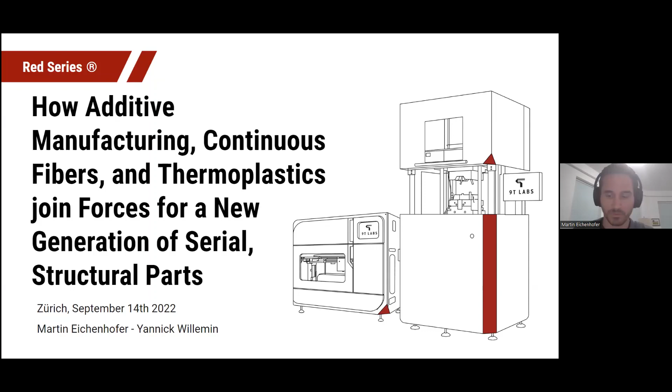Sven already mentioned our names and a little bit our background, but I want to recap and give some extra information. Some of you already know us, but for those who don't: Yannick Willemin is very experienced in composites, has been with SGL Carbon for more than 15 years before joining 9T Labs, closing in on 3 years now. So we already have some good history together, very excited. He is heading our marketing and business development efforts, and has been in various roles throughout his career, from technical to business development and management. It's great working with him.

My personal background is also mainly engineering. I've been in fiber composites, composite materials for almost 10 years, starting in my master's time, then throughout my PhD and at 9T Labs I continued that - mainly on thermoplastic composites and continuous composites in the context of additive manufacturing. It's a pleasure to be here. In my role as CEO at the moment, I'm more like a sparring partner for commercial and technical teams.

So let's jump into the presentation before we go into the actual agenda. Just quickly on the company itself: we are an official spin-off from ETH Zurich, a little bit over 4.5 years, closing in on 5 years in total.

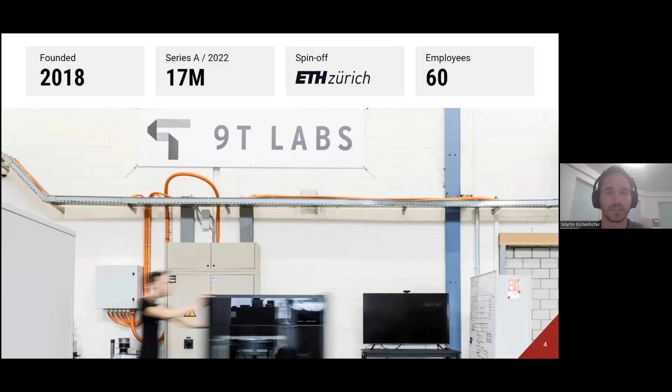We're getting traction here in the US on the commercial side. So let's jump into the agenda. I will start off and give a short background on motivation and context for our technology. Then I'll introduce the technology on a higher level, and then give it over to Yannick, who will present the core of this presentation, on hybrid manufacturing with AFT - Additive Fusion Technology, which is our solution. He will give some concrete examples on how to use this hybrid approach with our AFT solution. Then we have concluding remarks, followed by Q&A, as you are familiar with in webinar sessions.

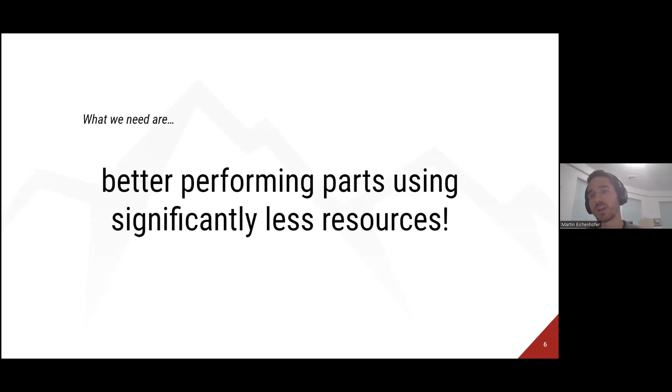So what we need are better performing parts using significantly less resources. This is something we always state, detached from composites first of all. But what we really need for the future is better parts than we have right now, across all the different applications we see across all the different verticals, but using significantly less resources.

And one of the materials that is very promising to deliver on that promise is continuous fibers, yes, but thermoplastic composites in particular. In this group, I don't want to go through all the different elements and highlight the composites and what they have, because you have this background already.

I just want to state that usually it's perceived a lot about lightweighting the part, and that's correct, but there are also other merits to the material which a lot of people might not know, in particular in the metal space, outside of composites.

So the X-ray radiolucency, the high impact absorption capabilities of the thermoplastic composites, the real chance to make a fully recycled, closed recycling loop. But also, there's something that would be a good topic for another webinar.

I would love to talk about this and dedicate an hour to this. But there is a real opportunity, in particular with our approach, to deliver on that promise of recycling and also bio-based materials. We have higher design freedom, dimension stability, low CTE coefficient. There are many different aspects to it.

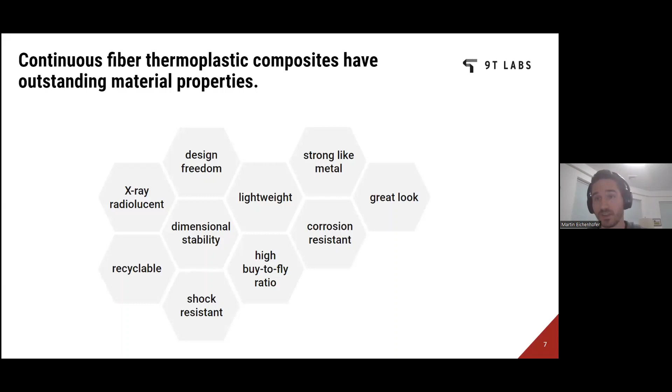So what I really want to make the statement is that this is a material that has the potential to really deliver on that statement I had before, making better parts with less resources.

So what are we currently making out of composite materials? Not necessarily just thermoplastic composites, but composites as a whole. There are a lot of different applications, but a lot of them are thin shell-like structures, and we have a lot of pultruded profiles. That's kind of the classic application parts which we have.

There are always exceptions in other parts, but this is kind of the standard parts which we have a lot right now in the industry. So a little bit provocatively put, what about all of those smaller, intricate, thick, complex parts, which are predominantly in metal still?

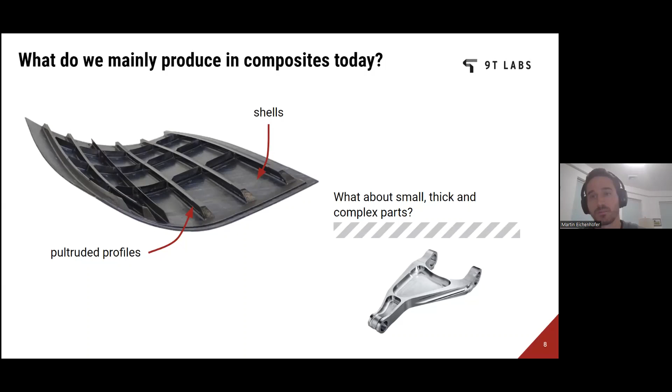And there's always exceptions to this, but when it comes to a structural part that's complex, thick, it's predominantly in metal still. So what are, or why is that? It's mainly because it's still a very expensive material.

There's a lot of companies working on getting the material costs down, but at the end, it's not just the material cost, it's also the technology stack itself, which is fairly costly compared to other alternatives like metal. So it's very expensive still, and there is still also a lack of integration with software and having a full solution approach.

In particular, one of the things is digital thread, digital twin, being fully capable of simulating the part in a digital environment before you actually have to do a lot of tests. This kind of element is easier for metal, or is more sophisticated, more developed for metal. And that's why this is also another very big limiting factor.

So what we need, and this is just a general statement, what is lacking is really this automation part to drive down the costs. Aside from the material supplier also getting down the cost of the material feedstock itself and the raw materials, we also need this integration with software, to make a full solution, a full suite.

And that's something we'll also talk about today. So that's one of the key elements to open up new applications which we could not reach with the current technology, the conventional technologies we have right now.

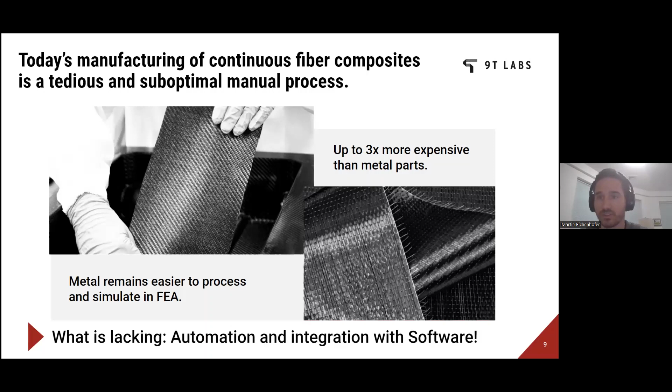So also here on this slide, a little bit provocatively put, additive manufacturing, 3D printing has huge potential to fill a gap in terms of this automation and software integration aspect. But it's easily pitched as if it will solve everything, like it's the fully automated integrated software that can do everything. But if you take a close look, it's more than just printing a part.

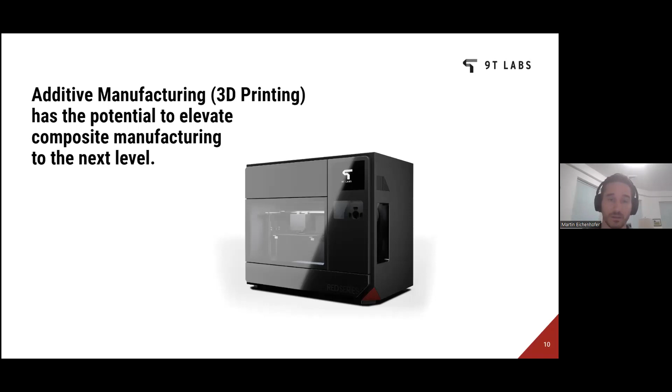If we talk about real applications, that's why I want to transition to this slide. So what does it really need to make a series production part, a structural part for metal substitution, for instance, that has real load carrying capabilities? There are many different ways to do those frameworks, but here's just one.

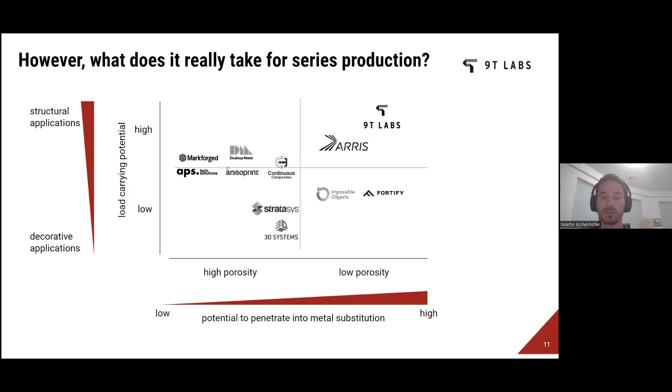So this is just to highlight that there is more than just printing to it, and I will talk more about this in a second. If we manage, and we are managing in applications already, to get not just the automation and integration with software through additive manufacturing into the solution, but also the load carrying capabilities and the quality which you need for series production, there is a great market opportunity.

I don't want to talk too detailed about this. If there's a question, we can also deep dive, but there's a great opportunity for thermoplastic composites, which are already growing in the composite space, and also focused mainly not necessarily all on very large applications. I mean, there are also fuselage aerospace applications, but there are also a lot of smaller applications which they are targeting. So there's a great chunk of opportunity with our solution, which we can target.

And there's also a great chunk of opportunity in the, let's say, metal substitution area, which we now highlighted here, the precision parts. If we look deeper into the precision parts, there's this high-end precision parts like medical, aerospace, recreational, automotive, electronics. So more like smaller, intricate, complex, usually also thick parts for composites, which have a great opportunity when it comes to the commercial side.

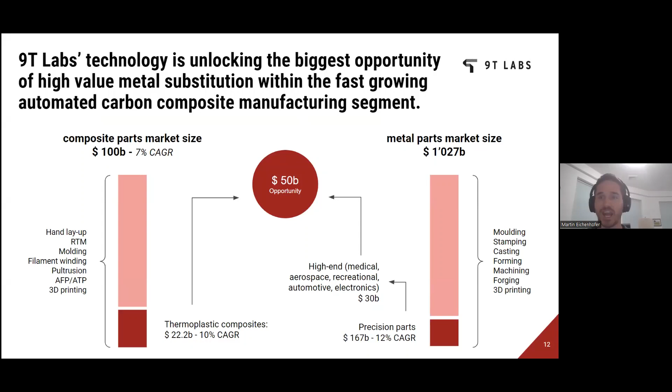So we're talking about more than $50 billion opportunity. That's why it's not just a nice technology solution and technology stack, like the entire additive composite space, but it also has great commercial opportunities. So how do we do it?

Using 9T Labs' additive fusion technology. This is our technology suite or technology stack, and I will quickly introduce this additive fusion technology now. Some of you already heard this before. I will not dedicate too much time to it because I want to rather give it to Yannick, and he can talk about the hybrid approach. But nevertheless, I will make a proper introduction on our technology stack.

So this is the full solution you see here, what we call the additive fusion technology. It has different pillars like software, the materials, the continuous fiber composite materials, 3D printing, and also the molding technology. So all the different elements are key to succeed in making structural series production parts.

So in the software, you get really this design capabilities to make optimized parts, better lightweighting parts, but also the capabilities not just to simulate for making it more lightweight, but also to validate, digitally validate the parts. So having a fully digital prototyping environment. But we'll talk more about this.

Then continuous fiber materials, we're not just talking about adding some fibers, not short fibers, continuous fibers, but also a lot of them. So we are talking about real structural performance.

And what's also important is that we don't reinvent the wheel on the material side. We want to have materials that have a proven track record that are known to industry. We'll talk about this in a second in more detail.

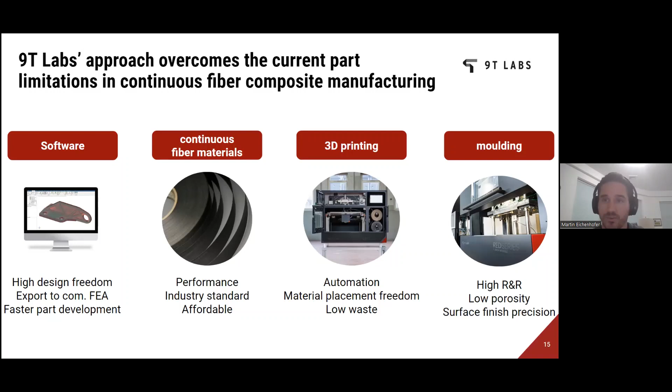And at the very right, we see the molding aspect, which is a key element. So we're not just printing, we're also molding the parts. This is key to get all the final checkboxes for quality when it comes to surface finish, interlaminar bonding, porosities, but also gives a possibility to integrate with other materials like inserts, which can be directly co-molded, and you can also add multiple parts together. I'll elaborate a little more in slides to come. But this is the full solution, and it really needs all the different elements to open up new applications.

Just to highlight a little bit how the software is structured: we have something called Fibrify Design Suite. This is our design software. It's a full CAD environment, direct model environment, where you have a suite of tools on how to place the fibers, and we'll gradually get more automated features into the suite. I can talk more into detail if there are questions, but I'll leave it like this for now for the introduction.

What's also important to understand is this environment has a direct link to commercial FEA tools. We work a lot with ANSYS, but there's also Abaqus and Nastran environments which we can use to simulate the part. It's not just to optimize the part, also to digitally validate it. Sometimes people forget that validation is also an important aspect, not just the optimization part.

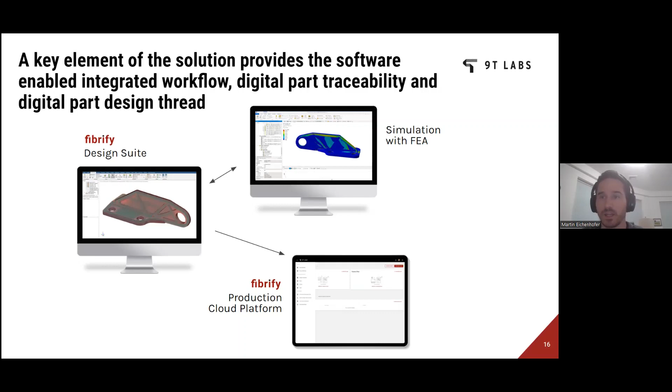And we have another software component in our suite, which is Fibrify Production. It's a cloud platform connected to all the devices, the hardware, but it's also connected to the design software. So it's basically where all the data and information comes together - the sensor data, the processing data, the log files, not just the design files. That's important for a full solution.

On the material side, we have to understand there are two materials, and I'll talk on the next slide a little more in detail how to use it. We call it material pair - one is either neat or short fiber reinforced filament or plastic, and the other is a continuous fiber tape with a high fiber volume content.

What's important here is that we use certified materials for regulated industries - materials known to industry with a proven track record. You see some of them like PEEK, PEKK, PPS, the nylons, also PA12, bio-based materials. And the fiber isn't necessarily fixed - we do a lot of carbon fiber right now, and on the R&D side we also work with other fiber reinforcements, like glass, basalt, aramid.

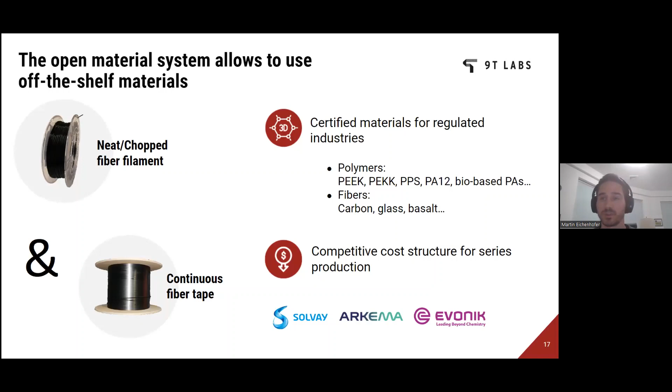The second main aspect of this approach - going for off-the-shelf, known materials like the continuous fiber tapes, which are probably the only standard thermoplastic composite feedstock in industry - is also important for cost competitiveness. You see our partners here at the bottom: Solvay, Arkema, Evonik. Those are some of the public partners we work with on our different materials and portfolio.

So when I talk structural, I really mean structural materials - high fiber volume content materials.

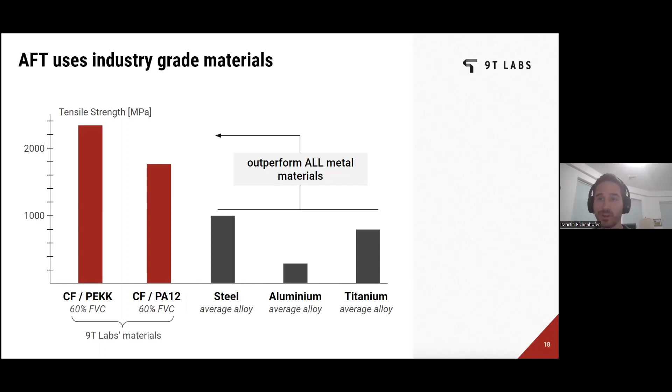You see the tensile strength is what you'd know from the most structural fiber composite materials, 60% fiber volume content, so it's a real composite. It's not just something like, oh, we added some fiber and you have 400 or 500 megapascal tensile strength. It can outperform all metal materials, but I guess we all understand it's only good if we leverage the fiber and the strength of the material in the right way, to optimize the part.

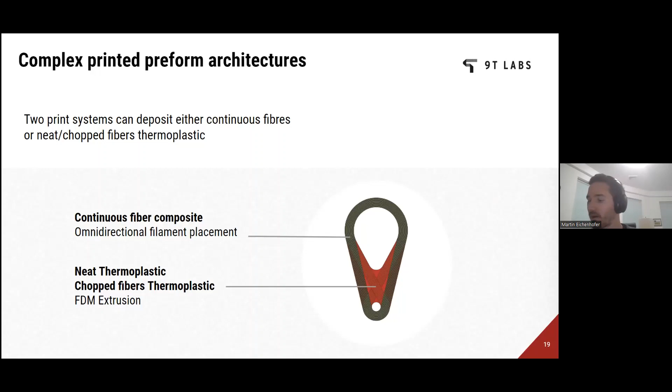One important aspect, and now we are talking about the fourth pillar in the introduction slide, where we had our solution, which is the molding aspect. The molding is important and has two main components: one is the quality, the other is what I call enlarging the design space. We can talk more about this in the next slide. Here on this first slide, it's about quality - the internal quality of the part and also the external quality.

So surface finish - you see here after printing, you still have the classic pattern on the side. The surface finish has this kind of bead, like a washboard pattern. You also see that internally we have some voids, porosity, and the interlaminar bonding is also not as good as what we know from an injection molding part, for instance.

After consolidation, it's a real molding process above TG, not just above TG but usually close to melt temperature or above melt temperature. So we're really remelting the part, co-consolidating the part all together. So there is perfect surface finish, what you'd know from injection molding or molding in general. You'd have perfect interlaminar bonding and very low residual void content in the part, which we're always shooting for - usually below 1% void content.

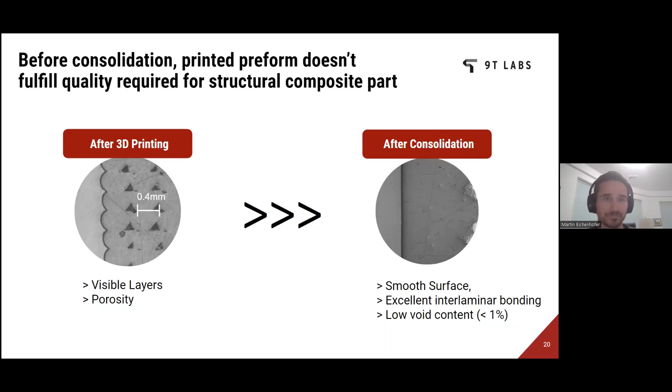So that's a quality aspect, very important for series production, getting into series production and real metal substitution.

But the other aspect is also that the molding enables us to make new things, have an enlarged design latitude, or we can do new designs we could not do before. One is that we bring in software, split an application apart into sub pieces which are optimized, and then they come together in the molding, co-welded or co-consolidated together.

This enables us to do applications like this hinge, which we show a lot, which you cannot do with conventional means, because you have fibers that penetrate from the vertical plate into the bottom plate - they're kind of intertwined and interlooped, and this is what we can achieve with this multi-part assembly approach. We can also directly integrate inserts and other materials into the part, co-molding them in.

But what we also can do, on the right, is we can reshape and deform parts in the molding as well. So this is the introduction.

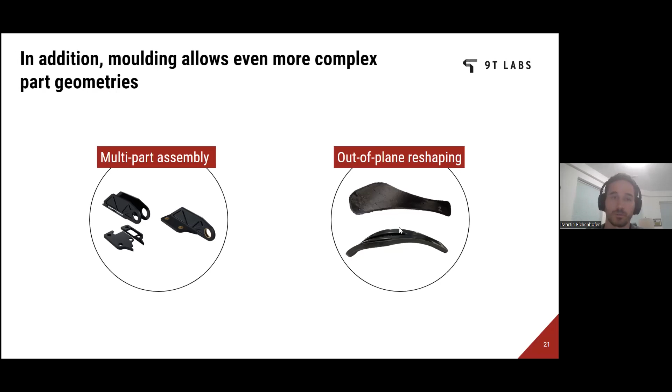We have a short video to also show, and then I would give it over to Yannick, and he can introduce the hybrid approach in this AFT context.

Additive fusion workflow offers a simple and cost-effective way to design and manufacture functional composites. Design even your most advanced part with 9T Labs Fibrify software.

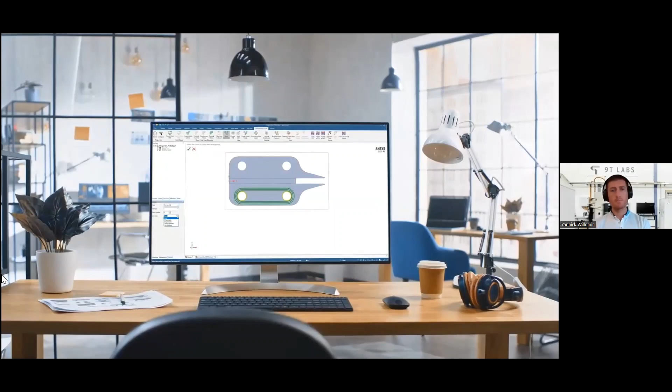For the first time, true 3D fiber orientation allows you to design applications which haven't been possible to manufacture in composites before. Our unique software platform links with your commercial simulation tool of choice.

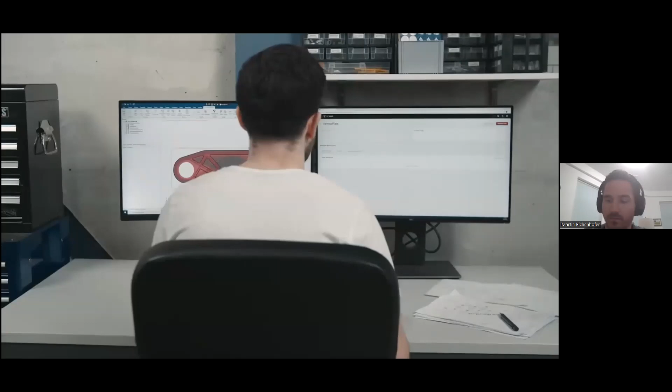This simulation allows you to validate the optimal part design and greatly speeds up your product development time. On the shop floor, our integrated cloud software acts as your manufacturing execution system.

9T Labs technology lets you produce parts that are 10 times stronger than metal at 1/3 of the price of conventional carbon composite solutions. Full process control, sensor integration, and cloud connectivity.

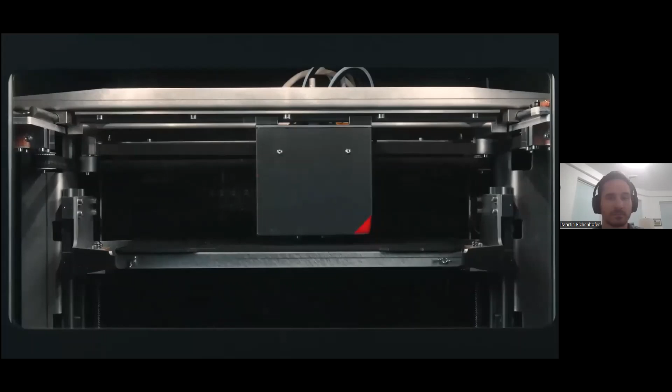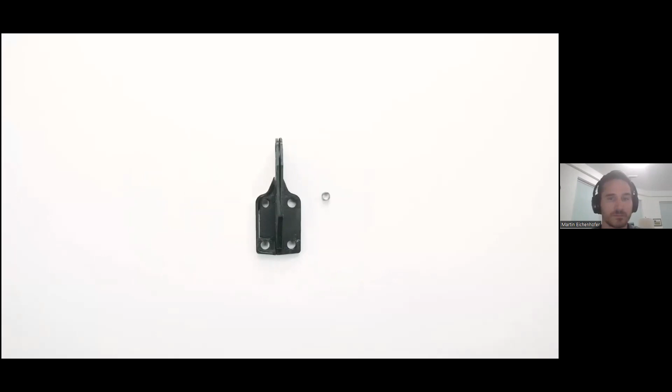A carefully engineered deposition system allows trajectory conformal printing under controlled temperature conditions, combining multiple parts to reach unseen design latitudes in fiber composite processing.

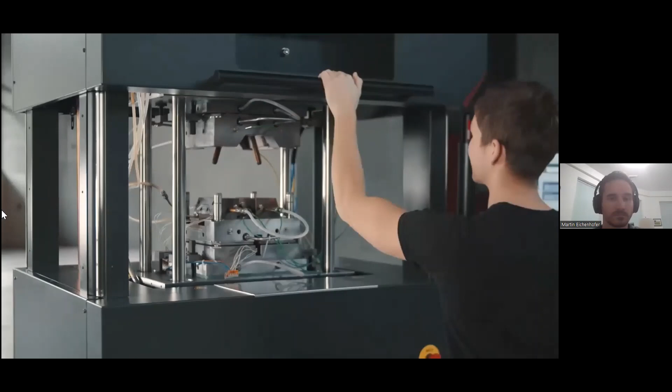9T Labs hardware and cloud connectivity highlights our philosophy of full process and data control. Fuse parts by applying pressure and heat to get superior surface finish, get maximum adhesion and low porosity, unleashing applications

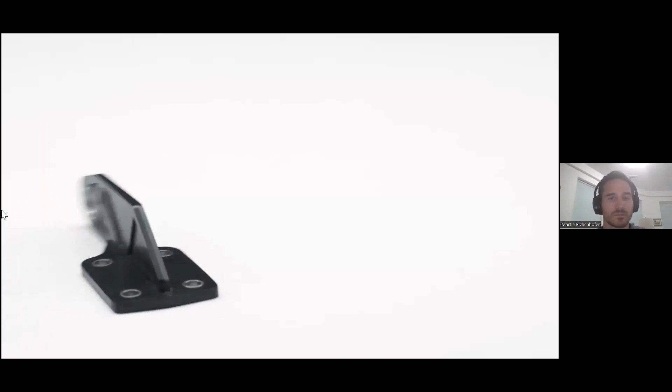and performance never seen before in composites processing. Join our revolution. Take 3D printing to the next level with 9T Labs.

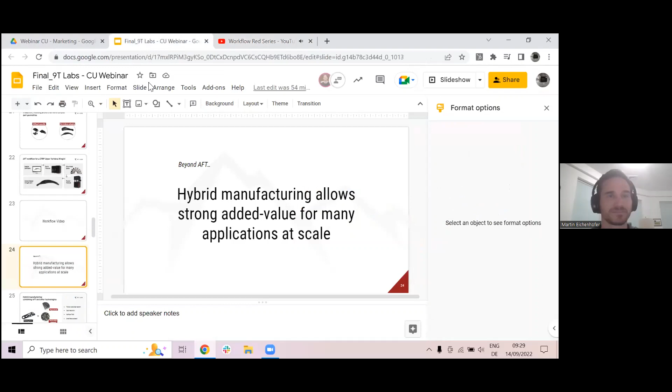So now I'm going to take over. I hope you have now a good idea after the introduction of Martin and the short video of how AFT works as a full stack solution.

And now let's go a bit beyond the current applications and what we are looking into already now at 9T Labs to really tap into a bigger pool of applications.

And this is what we call hybrid manufacturing. So it's really kind of beyond AFT, and it's how to allow actually strong added value for many applications for

real serial production. And here it's really about, of course, looking into the final properties. So what do we need? I mean, in serial parts production, we often need performance.

Performance means, of course, mechanical performances, structural performances, but also cost performances. That's always the balance we are confronted with, we are challenged with.

And of course, on the mechanical side, there is some hiccups. If you only print and consolidate, you still have the topics of torsion and shear, which is not always solved

with the designs. Surface finish is a big argument also, of course, in many different final parts. The small feature details, which can not be brought with a printer, especially if you want to post-consolidate.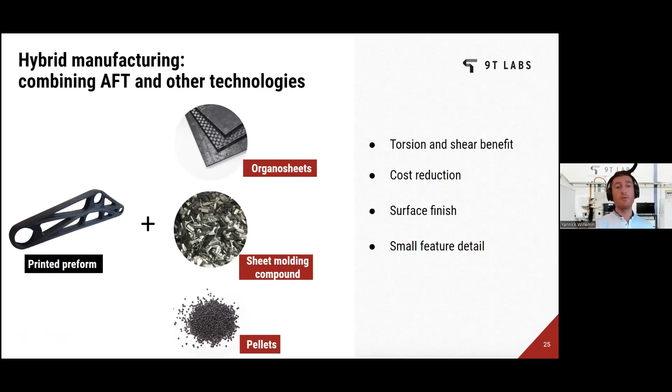What I would like to do, as Martin was saying, is go into two very precise examples, two parts we have developed, and step by step show how AFT combined with other materials and technologies can tap into all the challenges currently given for those parts, which were actually in metal. Both parts are currently aluminium, so the benchmark is aluminium, and the goal is to challenge them with composites.

First example: a motorbike application, specifically a motorbike rear suspension rocker arm. We see on this motorbike several parts we have tried or are producing in-house. One of them, shown on the left, is this rocker arm, which has basically 3 anchor points and allows the movement of the back wheel.

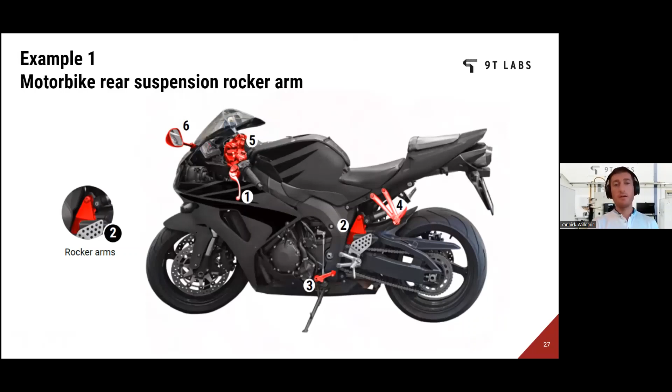Our approach, coming back to this digital prototyping loop, the digital environment, is step by step: we get the original design from the customer, along with boundary conditions, load cases, design freedom, volume, and so on. Based on that, we go into topology optimization. Currently we often do isotropic, but we are also looking into anisotropic topology optimization.

We also do some co-developments here with partners. However, isotropic topology optimization already gives us a great framework, a skeleton, where in step 3, using our Fibrify design software, we place the material along the load path. The goal out of this topology optimization is to understand where the core load paths are, and then place the continuous fiber exactly where those maximum loads are.

Where we don't need continuous fibers, it's about finding the best possible way to get to the final geometry with different sets of materials - could be neat filament from the printer, chopped fiber filament, overmolding, or adding an organosheet. In this case, we will see that it's about adding an organosheet.

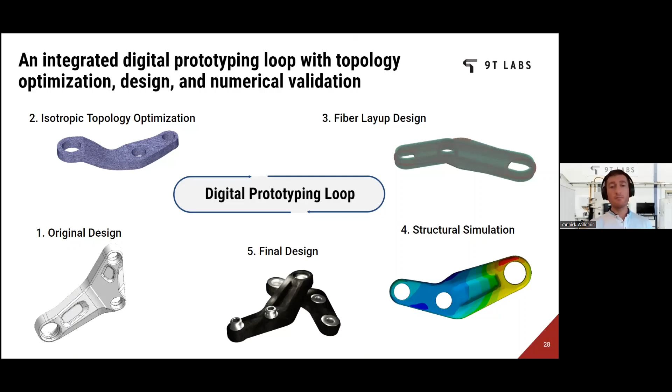What does it mean? This part, the rocker arm, definitely has some torsion load. Obviously, if you only join these 2 loops of continuous fibers, as you see on the bottom right graphic, connecting the three elements to the motorbike, it's not enough to cope with the shear loads, with the torsion.

So here the topic in the design was how to bring this extra material, basically how to bring these organosheets into the parts to withstand peak loads in torsion. We did some iterations and found out that we will place, at certain locations of the stack, those 0/90 unidirectional organosheets and combine them with printed preforms.

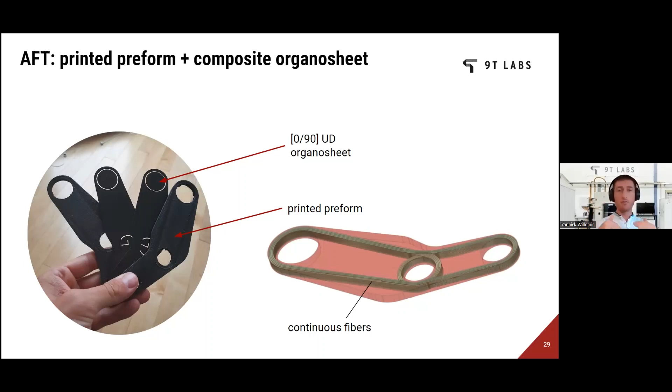The printed preforms already have a stacked design, so they are not the same at each layer from the layer point of view, but then we even add organosheets within the final stack. So how does it look like? Basically, when we come out of the printer and also the organosheet, all those parts are 2D - they are flat, isn't it?

That's also what is very interesting when we develop the final part in the digital environment - we can project from 2D to 3D and already take into consideration how to place the fiber for the final reshaped part, because this will create some inner stresses, and we have to know about it in order to decrease these potential inner stresses, which will either way be able to cure out of the part in the post process.

You see actually here we have very interesting parts. We go from flat, we reshape it by quite a bit - you see it's bent on the right side. It's quite some reshaping, while co-consolidating both our printed layups with the organosheets, and also integrating those metallic inserts, so that the part, as shown on the top left, is really coming out of the post-process, of the molding process, like shown here.

So very good surface finish. We might need some tumbling for the edges, but no milling, nothing on this part. So we are ready to go.

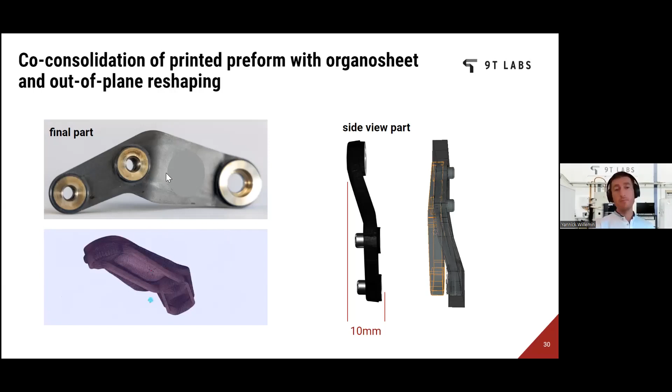What is the advantage here? We were challenged by the customer on the business case versus the benchmark. So for a volume of 8,000 parts per year, a production scenario given to us, we could prove we could reduce production costs by 37%. The weight reduction is there because of the density of the material, while maintaining the same performance. We don't need to overperform, but we need to be on par with the current performance of the aluminum parts. This is an exercise we do a lot with customers, going into cost modeling and really looking deep into where we come out at cost per part.

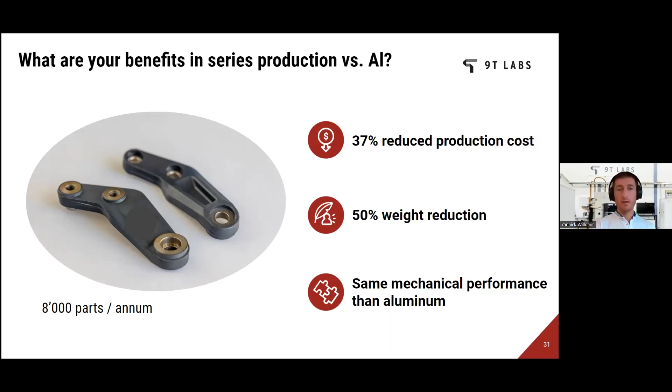Another example now in the aerospace field, and there are quite a lot of people from aerospace companies here today in the webinar. So here we speak about overhead bins, where you put your luggage in the plane. There's this pin bracket which is basically allowing the movement and of course holding these overhead bins. This is an interesting part - there's plenty of those brackets in the plane.

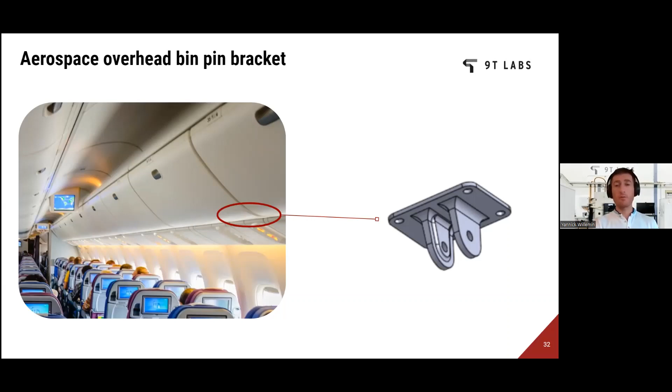One of these applications I'd like to show you in detail, because that's another approach of hybrid manufacturing. At the end, you could print, like for the helicopter door hinge Martin showed before, different parts, maybe 3 different parts, and interlock and co-consolidate them, but that would still be more expensive than the approach here. So the goal is how to really fine-tune the design to print a preform which makes a difference in terms of structural integrity of the part, while using faster, cheaper processes and input materials.

So here we speak about using SMCs. Those chips are actually coming from material waste, from other composite processes, so we can already tap into a kind of recycling of materials. We give them a second life while bringing them into structural applications.

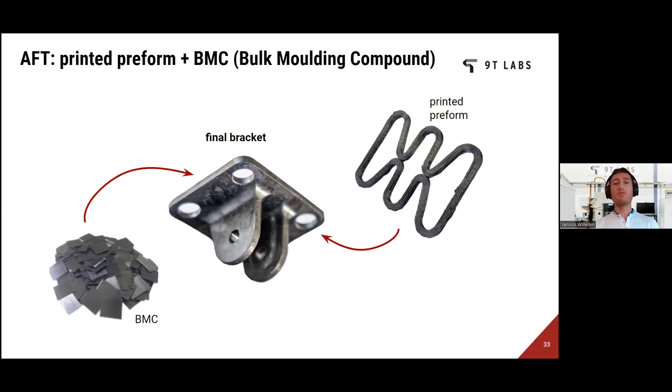But now you will ask, how is it possible with a very simple 2D preform to actually withstand 3D loads? When you look into the digital design - and we're writing a bigger paper on that to be published in a few weeks, showing real data, and we will cut parts, etc. - what we see in the first experiments, and what we simulated, is before molding we place this preform flat in the mold, and then through the molding process we actually steer some of the preform into the 3rd dimension, so we can carry load from the XY plane to the Z direction into the entire part, and then withstand the final loads.

What's also interesting here is that only 20% of the material is printed - let's say high value, high resolution - and 80% is this recycled, shorter fiber material, which is a nice split so that we have a way to control the costs of the final part.

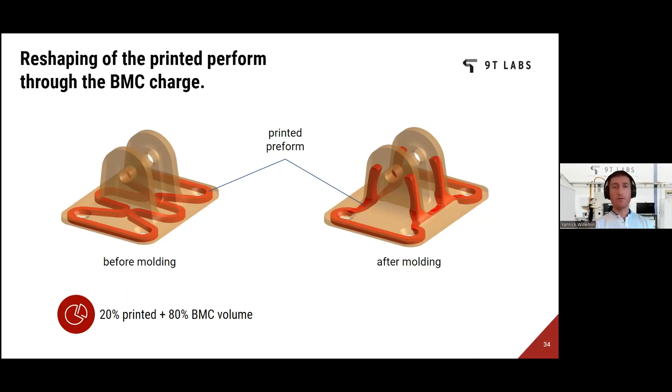So what does this mean? We're able to reduce production cost by 50% compared to the benchmark - we're always benchmarking against aluminum here. We have a 45% weight reduction, and of course we have to cope with the same load case, so mechanical performance is similar, and this will also be published in the paper. Here the production scenario is higher because there are really a lot of these small parts in the plane.

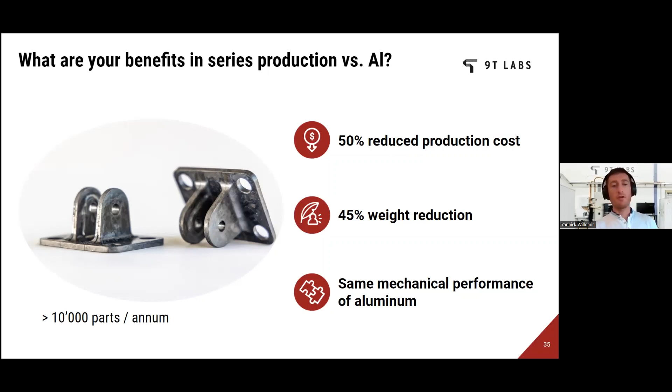To summarize after these two examples, what is the interest of our customers to go into this hybrid approach - here showing hybrid with organosheets, BMC and over injection. There could be other examples of hybrid manufacturing, but what are the extra benefits of doing this? With organosheets, the main benefit is really to go for the torsion and shear benefits. When we see this kind of loads, we tend to think from the toolbox: let's include some organosheets. Cost reduction is also valid because it's pretty neat - you just have to cut it out and then it's there. It's way faster than printing.

On surface finish and small feature detail, this is not really what we aim to tap when we use organosheets.

Then on BMC, obviously torsion and shear benefits are also there because we have more chaotic placement of these shorter fibers, meaning we are also basically more isotropic in the volume. Cost reduction is great because we can really also use recycled materials, waste material, so the input material can be way cheaper while being high quality. Surface finish and small feature detail is not the main target here.

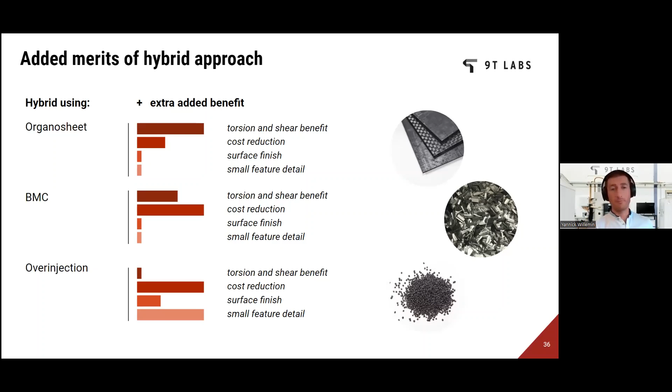So all this allows us to go into very different markets, which is also something nice. We screened over 300 applications over the last few years, and we also have a good idea where there is a good fit, where there is no fit at all, which is important, and where there is also place for our technological roadmap.

So in aerospace, obviously, a lot of those smaller, intricate parts like brackets, hinges, and so on. But yeah, also going to the turbine, maybe blades, struts, because we can reshape parts, which is then also interesting.

In the medical field, we tap into very different properties, as Martin was showing at the beginning with our kind of toolbox of thermoplastic properties. Here it's about X-ray radiolucency in surgical instruments, for example. It's also about dilatation, because you need to obviously sterilize those materials or these parts, so they need to keep their tolerances, very tight tolerances, while being reused. And we could also speak about implants longer term.

Of course, aerospace and medical, what is similar to these two markets is that they are highly regulated, which takes more time to get into. So we are doing projects here to step by step go into certification or understand how to certify a new process for these markets. In the meantime, where we can go faster into market and prove the points which we are claiming is premium automotive. I would say the automotive market in general is probably a bit too high volume for now, at this point in time.

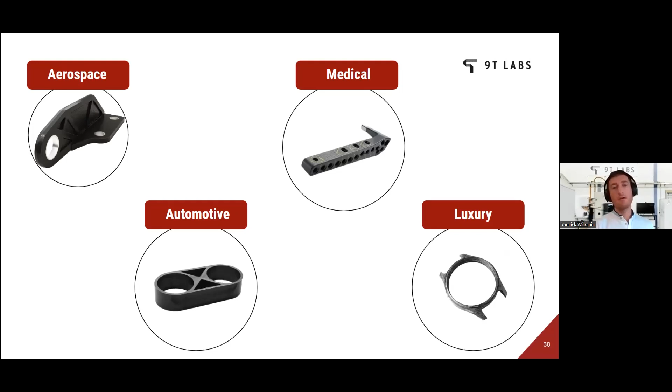So to summarize, what is the advantage of using such advanced manufacturing technologies? And of course, it needs to be assessed on a case-by-case topic. If you give us a specific application, we are able to make a feasibility judgment on it, both economical and technical, to really see if we can bring added value.

But all in all, by also putting our engineering knowledge into that, we are really looking to combine these different suite elements: cost competitiveness, lightweighting, which is very important for most applications because the high performance we expect to be at the structure level, and process speed, combining digital development and validation with advanced manufacturing technologies. Of course, because we are developing a new technology standard, we need to look into sustainability, both from the feedstock side, the processing, so being near net shape and not wasting material, and also thinking about how to recycle those parts which we are producing. So over the entire loop, basically over the entire life cycle.

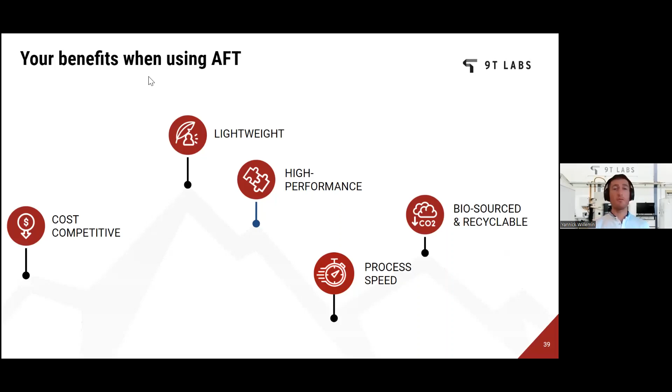So all these pillars can be combined, and we are really happy if you can challenge us with some of your applications. At this point, I would give back the microphone to our presenter or moderator.